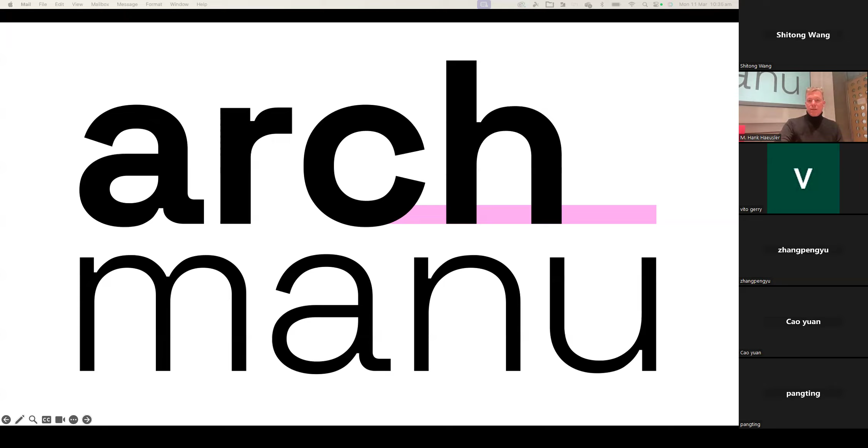So very quickly, as outlined, I've got a few hats. Over the years, I got quite busy in first doing the bachelor degree in computational design, and now more recently having those research projects and starting a little office, taking Philip as an example, that you could be an academic and still a practitioner at the same time. So we try to use a practice as well. So the three main things that I do right now: the ARC Training Center, which is a big research organization with 25 PhD students. You should understand that as a vertical organization where we research in 3 different areas I outline later.

And then we've got an applied vertical, the CRC 3D printing, because even though we are called architectural manufacturing, we don't really do actual architectural manufacturing research in the center. We do pre and post production and design in the center, but not fabrication. But the CRC is now a project where we can trial fabrication, and then the bureau is a computational design bureau where we can monitor ourselves, what we do through computational tools, and then test and prepare ideas for the ITTC and the 3D printing project.

So what motivates us? Well, there are 6 motivations. Architecture, engineering, construction is responsible for 50% of global emissions. 50% of all landfill waste is from us. Now imagine if you demolish a building, it's a huge amount of materials. And we also use 60% of all natural resources. These figures are probably from a German context. I used a book from Werner Sobek. But I think they would be very equal in Australia, in China, around the world. We really take a great part of the problem that we face at the moment with climate change by being architects.

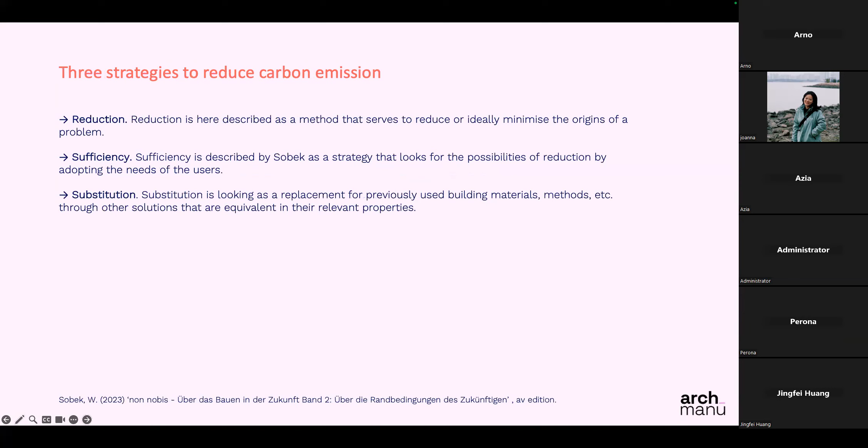Werner Sobek, an engineer from Stuttgart, wrote two really, really good books, unfortunately only in German. It's a big pity because then only Germans can read it. In these books, two of which have been published already, he talked about where we have to start from, looking into some sustainable concepts. To argue that we only need to build in timber is an illusion. There's not enough timber around on planet Earth to build in timber.

So in his second book, he looked into different strategies to reduce carbon emission. One is reduction by reducing the amount of materials, lightweight structures. We reduce the amount of materials, so therefore we save resources. We'll produce, therefore, less waste. We emit less carbon. So reduction is definitely one option.

Sufficiency looks at the possibility of reduction of consumption, the needs of the users. I think, unfortunately, it is an illusion to think that everyone in the world will have the same standards of living as the Western world would have. Air conditioning, warm houses, there's not enough material around. So I think slowly we need to come to grips that we need to design better with the materials we have already, potentially recycle materials, and reuse things that we have used before already in our design.

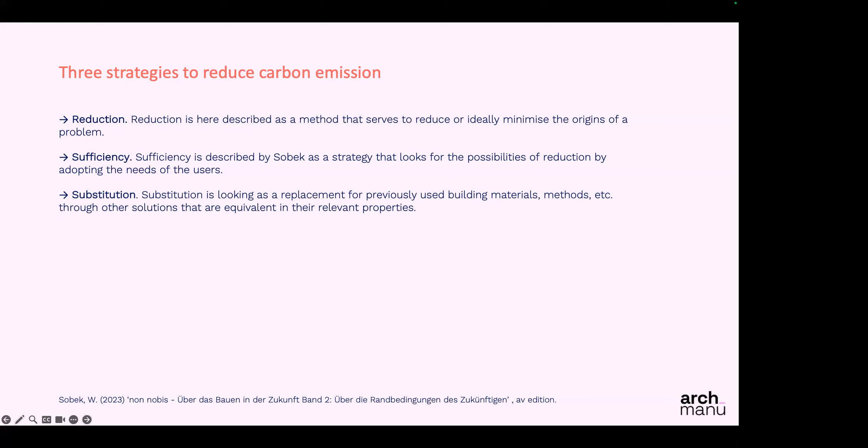And substitution, maybe looking into materials that grow. Timber, of course, grows, but so does mycelium. So maybe looking to biomaterials that grow again, where there's nearly an endless supply, versus a finite supply of sand. Sand for concrete slowly runs out on planet Earth. So to continue building with concrete is not possible because there's not enough sand around on planet Earth. But is there a way to substitute existing materials with new materials? That is one of the areas we want to explore.

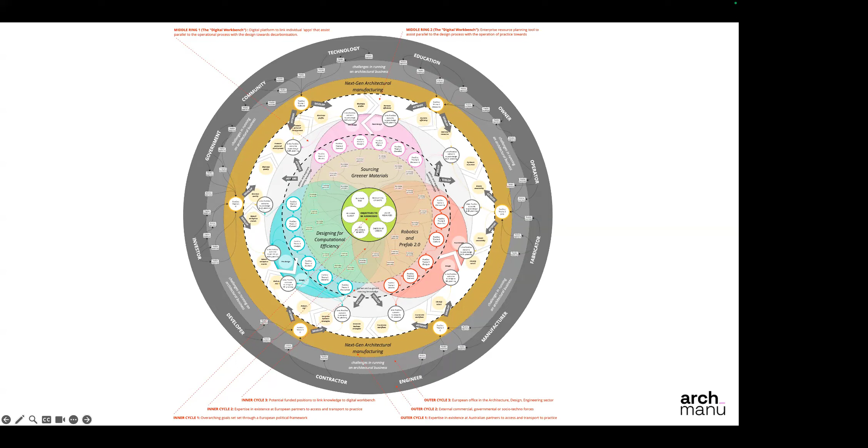So that's one of our maps of the world. It's rather complicated, that map of the world, but I think it captures a lot of our ways of thinking. So let me quickly outline that map. In the center, really, we've got the six areas that I outlined before. It's really the emission, the materials used, the waste produced that we need to reduce.

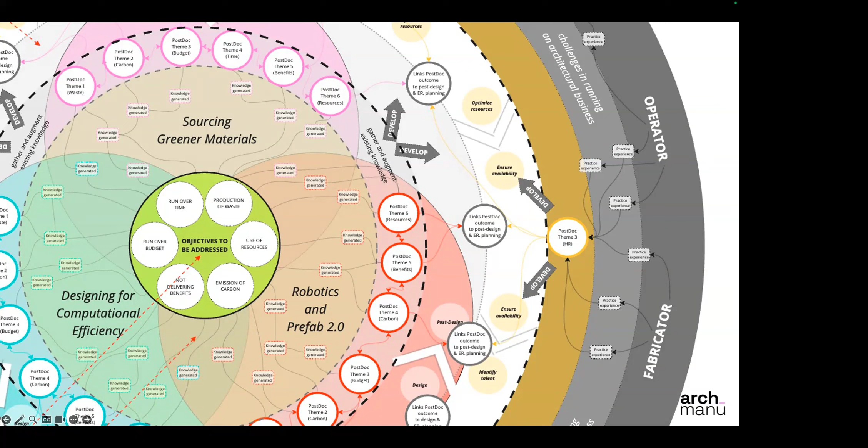On the other hand, on the outside, you as an architect are probably conflicted between the need to design more sustainably, but at the same time, you have to deliver your project on budget, on time, for the benefit of the community. So you're conflicted in the sense, yes, I want to build green and I want to use a sustainable material, but the material costs six times the amount of money of the other material, and it comes three months later than the other material. And it's potentially a different dimension, so I can't develop my design as I want to. So there's a conflict there. It is quite hard for architects to do these kinds of things, but that's the reason why we want to research into them.

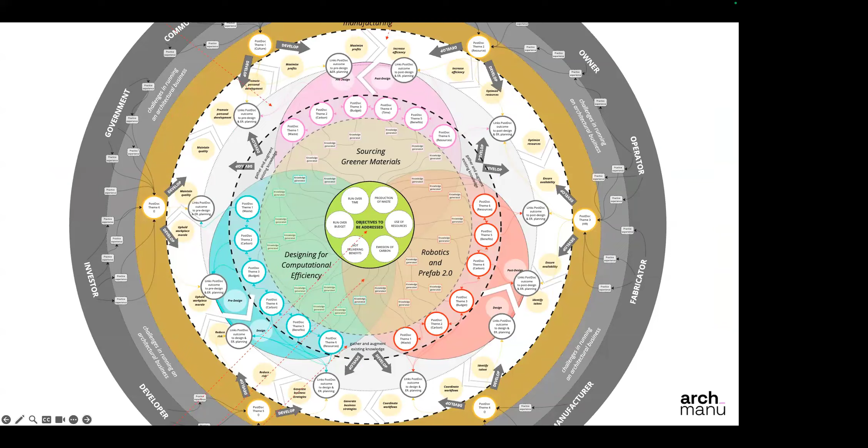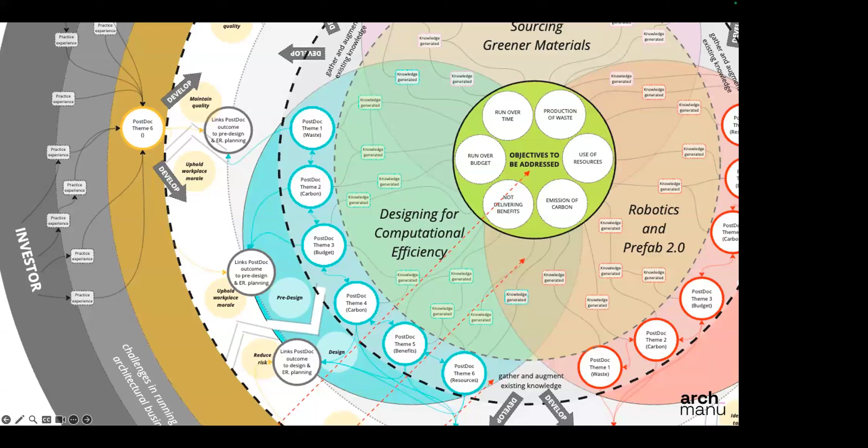So then within the area, we've got three main areas of our future interest, and I want to outline those three different areas in detail now. The first is designing for computational efficiency. We've done that for a few years now. In 2014, I established a Bachelor of Computational Design. In the Bachelor of Computational Design, we teach students only computational design.

They apply their computational design thinking and their knowledge of tools to architecture, landscape architecture, and so on, but they're not architects. They're not accredited as architects, they're computational designers. In the same way, if you study industrial design, you're not an architect, you study industrial design. So we argue that computational design now needs its own degree because it simply affords certain things that other degrees don't.

So around 400 graduates have been educated already. They find employment in firms quicker than architects because they've got skills that architects don't have. They can program computers, they can work on a project with an architect and say, here's a Revit model. In my Revit model, I have hundreds of different kinds of doors, and I want to have a door scheduling script that ensures that every time we change something in the design, the door scheduling is correct. A very mundane exercise, but needed in the firm. You can do it manually, days and days and overnight, or computationally, where the computer constantly responds to the design.

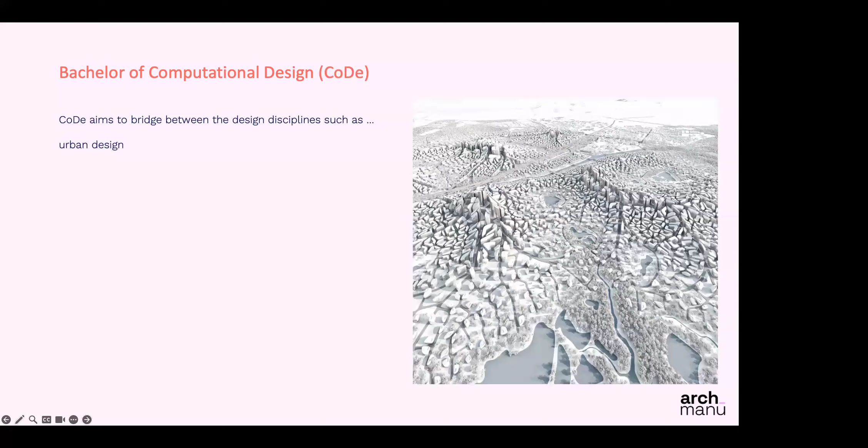In computational design degree, we aim to bridge together disciplines like architecture, urban design, landscape architecture, industrial design, interaction design, gaming design, or user-centered design on the design side, together with engineering science disciplines.

I think one important way of thinking about computational design is the following. Everything we see here that is designed is geometry. That coffee cup is geometry. The room is a geometry. The watermelon is geometry. Everything is geometry. Geometry is mathematics. If it's mathematics, you can explain it to the computer because the computer understands math. And then you can develop a giant equation that just takes all these different elements together. At the end of the equation, you've got a building or a city or an object. That's just a matter of scale.

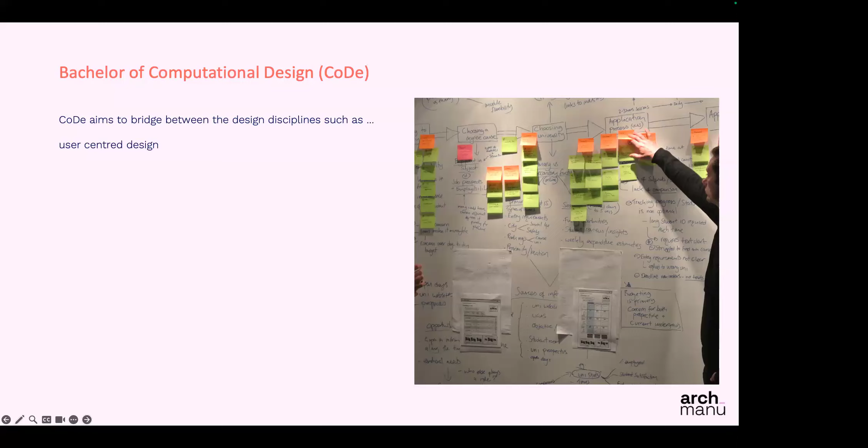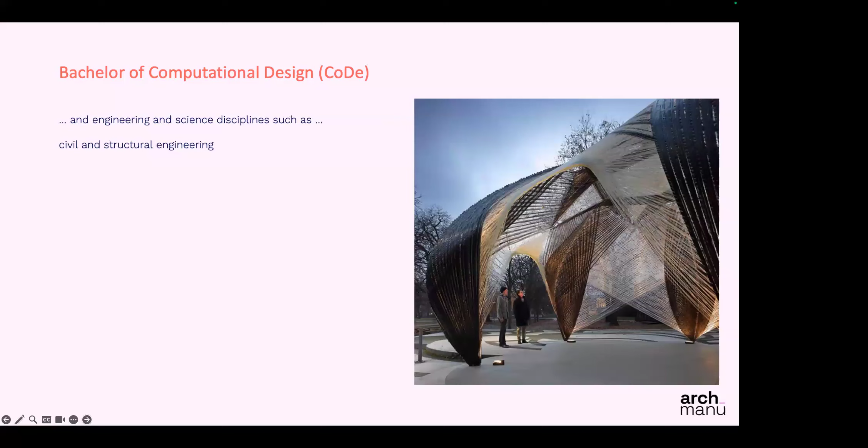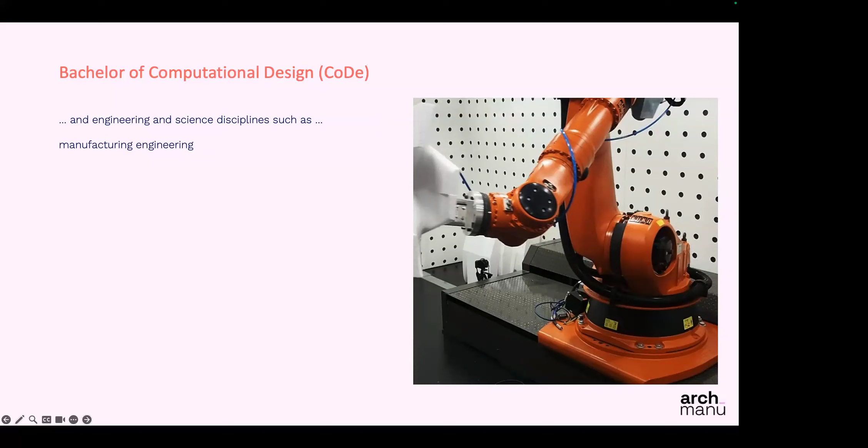If your dimension in one of those numbers is a millimeter, it's industrial design. If it's kilometer, it's a city. And you then got the opportunity to feed into the equation physical elements that come from different disciplines like electronic engineering or civil engineering. It's very, very easy - you all know how to bring a structural calculation into a computer program. You just explain the numbers to the computer program and then the design responds to that. Manufacturing engineering, as soon as it's machine readable, it's machine code, you can feed it out. You can take biological information, science information, human-machine interaction, mechatronic engineering.

So it's not that our students learn all these kinds of things, but they've been educated to think through these things. So they've been opened up to think between design on the one hand and engineering science on the other, through a profound understanding of computation and computing, combined with creative problem solving in a postdisciplinary framework using action research methodology. So they really sit between different disciplines and say, well, if we want to work together, I can speak to different disciplines, and through my understanding of computation and computing, I can do so.

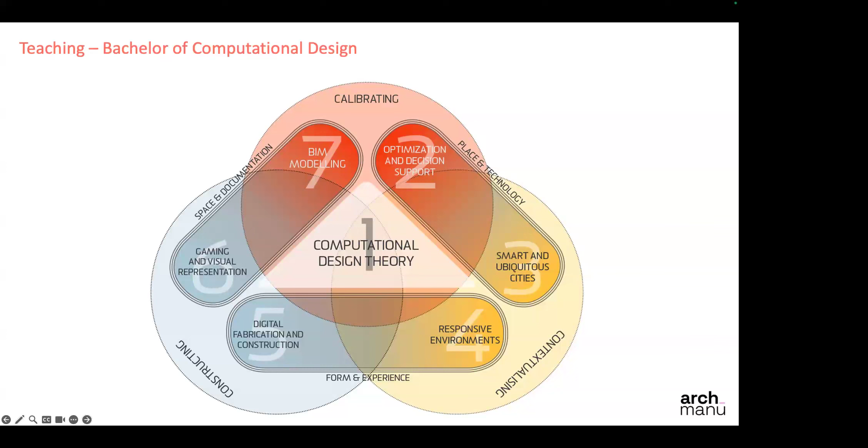So that's the framework of teaching. We don't want to educate CAD monkeys. We want to educate computational thinkers. So we place theory and thinking in the center of the degree. All our students will learn computational design theory, thinking, and then apply that kind of thinking within a framework of tool sets and a framework of problems around them to apply.

So here's the degree. At the beginning, we've got a design collaboration studio. We've got some shared studios that we share with other design disciplines that are not computational. We introduce computational design theory 1 in the first year, where we really explain what is computational design thinking, what do we do differently than other disciplines did before, what other people have thought similar to us, and how can you build that up. Then it goes into Grasshopper 1 on object design, Grasshopper 2 building design, Grasshopper 3 on structures using structural optimization, on urban design, then systems where you've got a lot of data and conflictive multi-objective optimization.

And data, where we slowly reach out to AI and machine learning as well. These courses still use Grasshopper, but more as a sketching tool, because Grasshopper is good - it's easy to learn, easy to get into, but it's not very robust. So we're slowly going to move here to JavaScript. We use a lot of homepage programming, as we think the future of computational design as a tool set could be on the web, so therefore JavaScript programming is what we teach students there.

In parallel, you've got design computing 1, Python scripting on design problems, design urban computing, a second Python course on electronics - so Phidgets, Arduino, Raspberry Pi programming - then robotic computing, where students use Python programming to directly operate a robot. Again, a computational design theory 2 package, where you get a second set of theoretical thinking, more advanced.

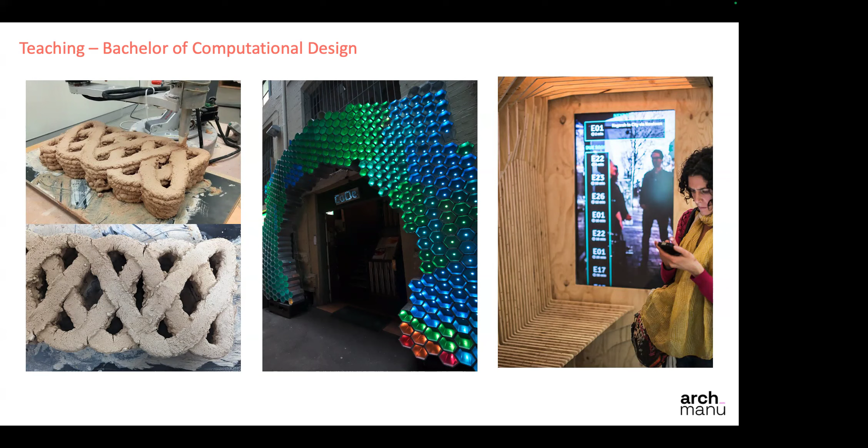So yeah, every year we've got the computational design conference where students present the results of their thesis and talk about that.

So we want to replace carbon-intensive materials with low-emission, grown materials, with potential looking particularly into Australian materials. We've got very strict biosecurity laws in Australia, so it's very hard to bring, for example, coconut fibers into Australia from the Asia-Pacific region because of biosecurity law.

At the same time, we've got lots of agricultural waste in Australia—we produce cattle, grain, wine, beer, all these kinds of things, and each of these agricultural manufacturers produce waste. So we want to look into agricultural waste as a building material in the future, looking into various bio, local, or low-emission construction materials.

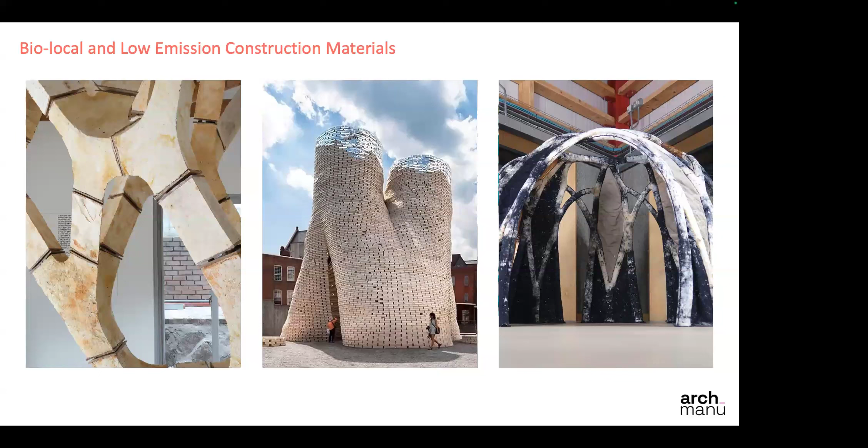Here are a few projects from other areas, particularly in Europe, where you can see a huge trend—some photos from Copenhagen from last year in September, from an exhibition at CITA in Copenhagen. So I think there is an interest in biomaterials.

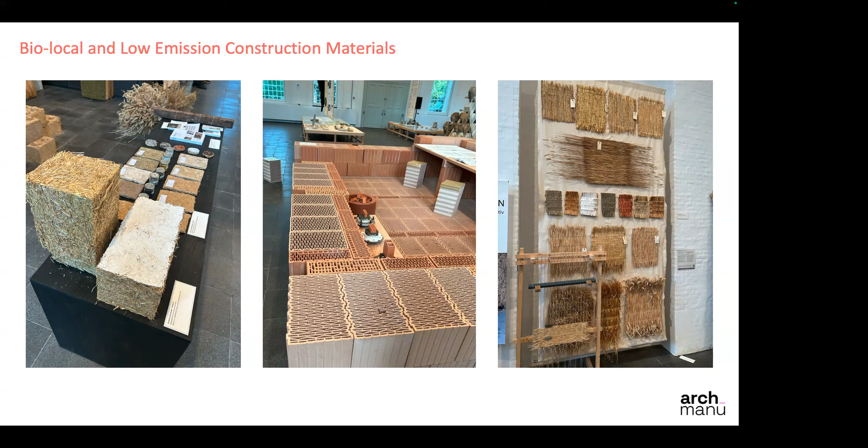We slowly start looking as well into biomaterials, generating elements out of mycelium and structurally testing them. We can feed the results of the structural test into Karamba, which gives us an opportunity to computationally calculate what the material can do and how you can fabricate with it.

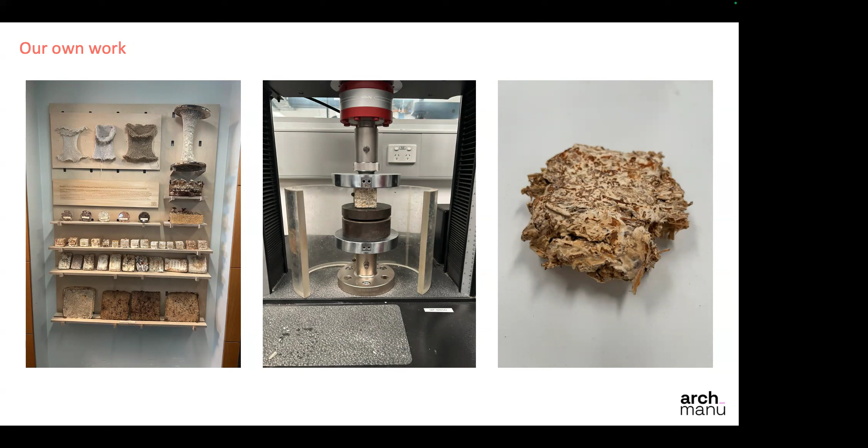Robotic fabrication is another area we've been looking into—again a rather young trajectory. I hesitated for a long time to look into robots, not because I don't like robots, but because other people, like Philip or Achim in Stuttgart, are by far too advanced, or the colleagues in Zurich, in robotic fabrication as a research topic.

But now, through the education framework with the students, I think it makes sense to educate them on a bachelor level. Through time, there's also a trajectory of training so we can do research, because to do good research you need talented students trained in computational robotics—then you can go immediately to the next level because you don't have to start from zero. When students come into a master's or PhD level, they already have some knowledge. We also got some funding through a government grant on 3D printing, which I'll talk about in a minute.

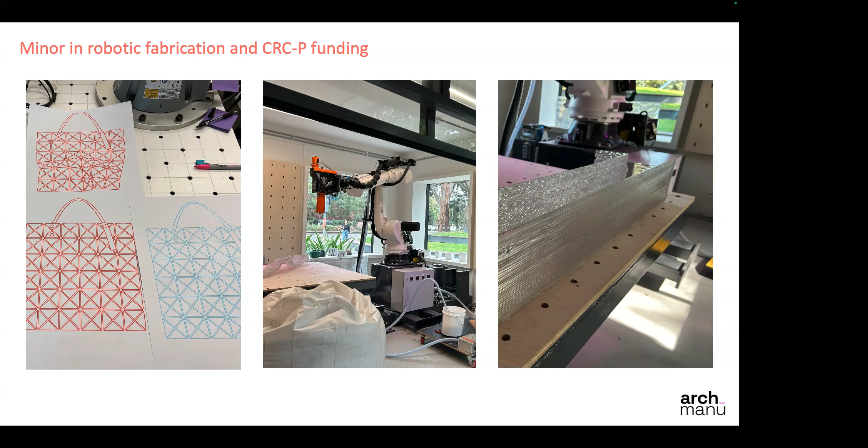So we do some small projects—we were commissioned by Issey Miyake for the Bao Bao bag to do some robotic drawings, and we're also doing some 3D printing with robots. We're working on that at the moment.

These are acoustic panels using recycled plastic. One of the meeting rooms in our office has rather poor acoustic performance, so we decided to design some acoustic panels. Six of the seventeen panels were fabricated already when I left—by now most of the panels are probably completed, and we'll install them in the room, test their acoustic performance, and potentially publish the results.

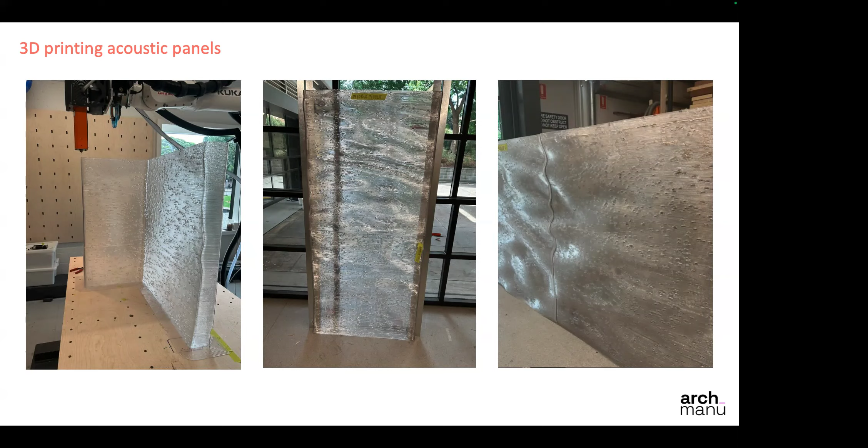So the second big research project is really CRC-P 3D printing for remote environments using local materials. For that, I probably have to explain a little bit about the Australian context.

Australia is probably the same size as China, but in the whole of Australia there are probably fewer people than in Shanghai. So we've got 30 million people over the whole size of China.

That means the whole country isn't empty, but there are certain parts that are rather empty, where you have to travel potentially 300, 400, 500 kilometers between village and village.

So if you live in one of those villages and you want a house, the only way to get one is by getting it designed and built in the capital cities. For example, in Perth, a big city on the west coast of Australia, you cut the house in half and bring it 4,000 or 5,000 kilometers up north to install. So you can imagine the cost of delivery is enormous.

These houses normally cost 60 to 80% more money, and the house you get is therefore a rather poor quality house, often not made for local conditions. Perth has a more moderate climate, similar to Wuhan, while the north of Australia has a tropical climate similar to Hong Kong. So these kinds of houses are not adequate, and they're expensive. What we want to look into in our research is changing the design for these houses by using local materials.

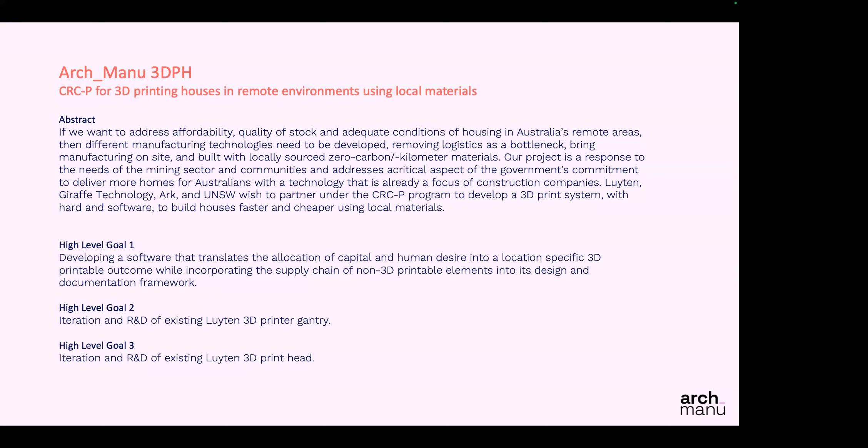So one of the main goals we have is developing a software. There are 3 main goals, 2 of them from the manufacturing side, from the 3D printing company we partner with. But what we want to do is develop a software that translates the allocation of capital and human desire into a location-specific 3D printable outcome. That's our vision.

Imagine a map of the world on a homepage. On that map, you can identify your site, and with a few clicks you say, this is my location. By clicking on that site, you would immediately get all the information related to it - GIS information on the homepage, so you'd understand the setback, the building height, the environmental conditions, heritage overlays, soil conditions, you name it.

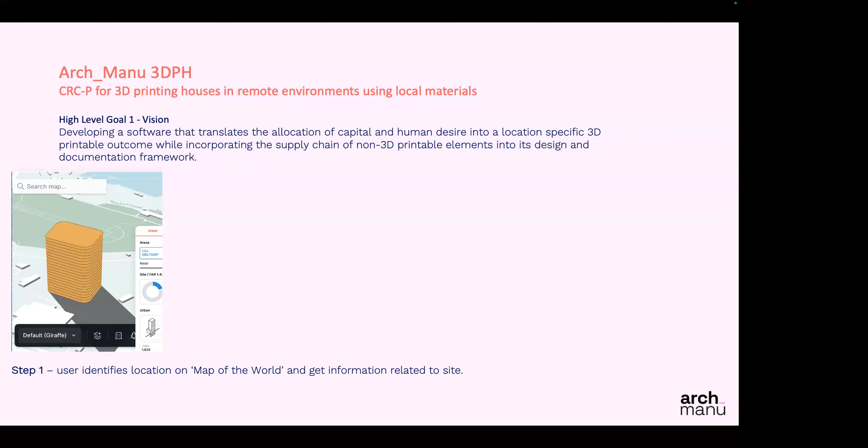In the company Giraffe Technology, which I co-founded, we already have that in place. I can go to any site, click where I am, and download certain layers that are publicly available. With all these layers, I get a full understanding of the context of the site, so I can design within that context, or the computer understands the context of the site.

The second thing doesn't really exist in architecture yet, but you already use it on Airbnb. When you look for a location on Airbnb, you can find a site and say my budget is between X and Y, and I need 3 bedrooms, 4 bathrooms, a pool, a sauna, a TV - you specify what you want.

So we want to use the same kind of principles for house design. You can go to the site, tell me your budget, how much you can afford to build a house, and what you want to have. It's similar to a brief in an architectural conversation with a client at the beginning - you say what do you want, and the answer might be: a house with 2 bathrooms, 1 bedroom, a garage, a living room, a kitchen, and I've got $1 million to spend.

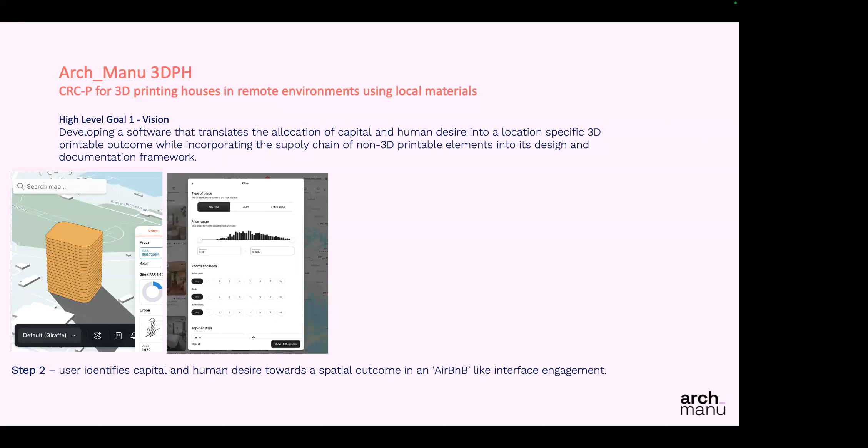That's my budget. So we can bring that information as well to the computer. It's numbers, so it's easy to compute. Step 3 is then using a template for a house. So we want to go away from the idea that you can design any house that you want to. We want to be more restricted in the same kind of way you're restricted when you buy a car.

If you go to a Porsche dealer, you will only get a Porsche, and you can choose between different Porsche cars. If you go to a Volkswagen dealer, sorry, only German car brands now, you can choose the range of the car you would have. But within the range of the car, you still got a lot of specifications. You can have different performance of the car. You can have different style of the car, the colors, the finishing, and so on. And whatever you choose will be a different look and feel of the car.

So imagine we're going to do the same thing for housing. You say there's 4 or 5 different styles of houses. There could be the villa style. There could be the industrial chic style. There could be the alpine lodge style. These are styles that you can explain to the computer as well. If you'd ask a computer with DALL-E, design me a house in a Norwegian wood timber style, well, the computer would understand what it is. It's seen a lot of photos, so you can use that as well. So we want to generate styles.

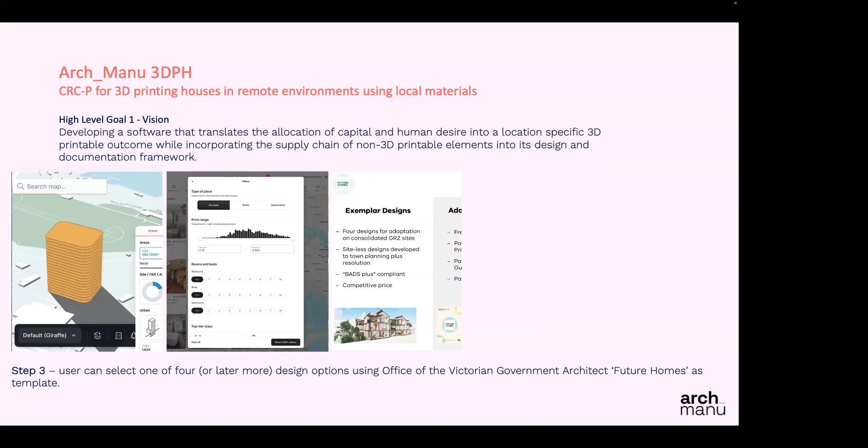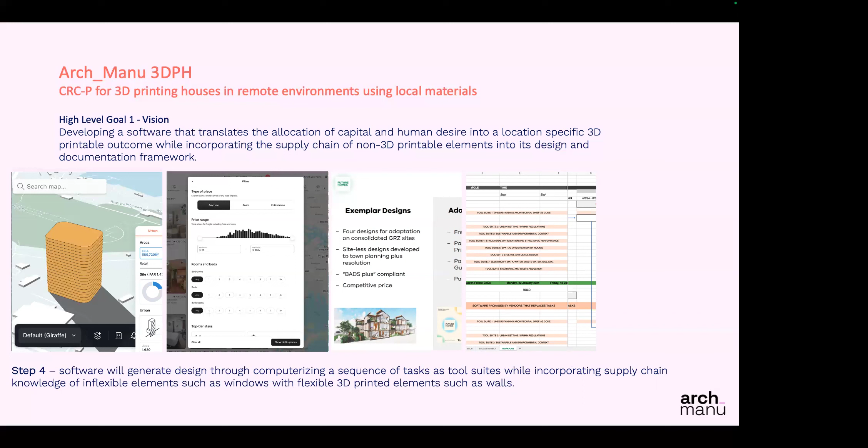And then with these 3 pieces of information, we start developing software that will take all these elements into a big computer program. And the computer program will then spit out machine code for the 3D printer to 3D print, Revit BIM information in order to engage other trades or look into prefabrication, DA, design approval for the government to approve the design. A set of 2D drawings can be generated easily, and visualization for the client, so the client could say, all right, okay, I can see what the design is.

And before I purchase the design, I want to look through the design. So imagine you've got a gaming environment where you can walk around and you say, well, I don't like the green floor, I want to have a blue floor. And you've been able to change that. By changing one material to the other, you immediately would have information about how much the material would cost. So the price would go up and down, the delivery time of the material. So you would understand the time of the project. So all this information could be computed.

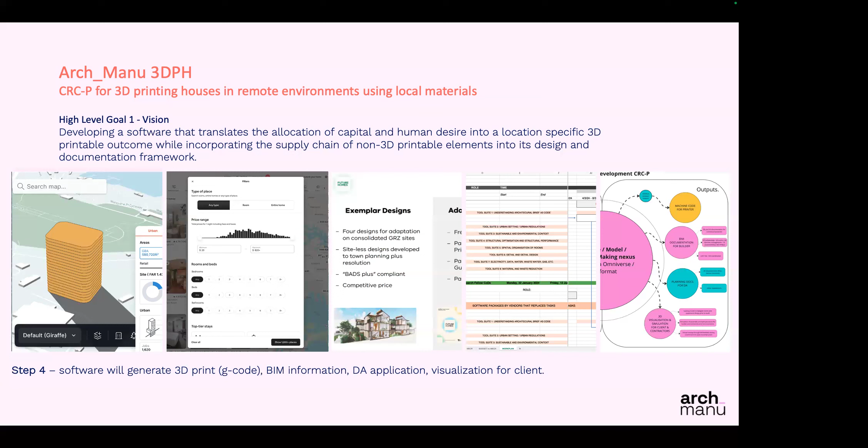We are also interested in 3D printing for another element when it comes to design for manufacturing and assembly, or modern methods of construction. Normally, when you assemble something offsite and you bring it to site, there's always a problem between different trades that things don't really fit with each other. There are tolerances. Construction normally is not a very precise trade. So you've got tolerances, and we bring 2 parts together and the tolerances don't really match because one thing is 3 centimeters bigger than the other. You've got a clash there.

I think 3D printing has the advantage for 2 areas. One, you can make performative 3D printing. Performative means that you can replace a lot of materials that you normally would use to build something with one material. So let's imagine you would build a normal wall. In a normal wall, you would have plasterboard on the inside, you've got some concrete, you've got some insulation material, you've got a cladding material on the outside, 4 different materials. 4 different kinds of carbon emissions, 4 different types of waste.

With 3D printing, you could do it another way. You can say, well, if I want to have a wall and that wall needs to perform in a certain way for thermal performance, for example, you can 3D print that performance into the wall. You can write a computer program that says, well, there's certain cavities within the wall, and these cavities within the wall would allow a certain U value of that wall, and you could 3D print it.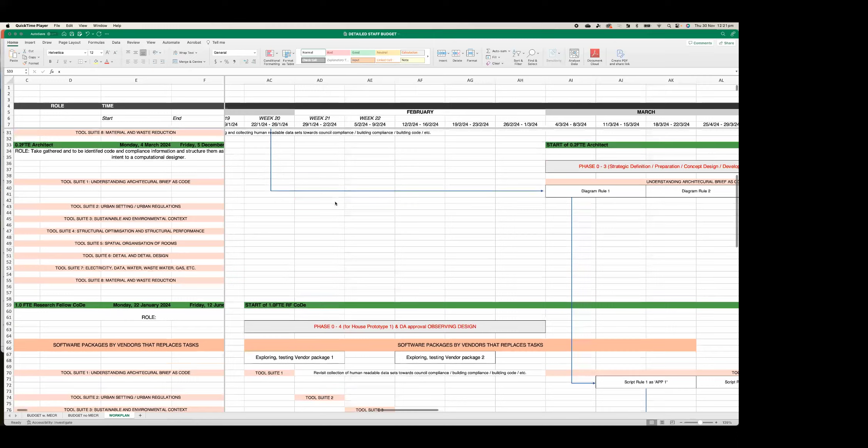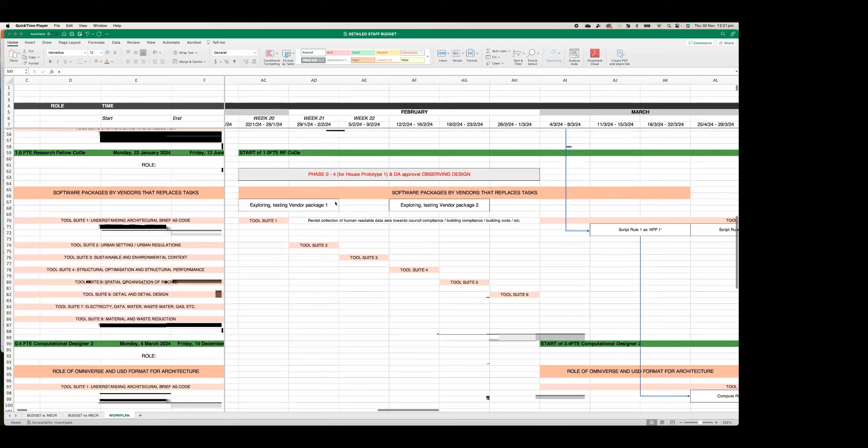So it's effectively software that sits in the computer and tracks every click you do, and then uses AI to inspect and analyze what you've done. So the software is able to understand: you opened Excel manually, you selected some numbers, you copied these numbers, you opened Revit and pasted these numbers in there. So the computer could understand there's an opportunity between a certain number set in Excel and a certain action in Revit that could be automated. So we can identify these little tasks, compute them in a computer program, assemble them, and do something similar to robot soccer.

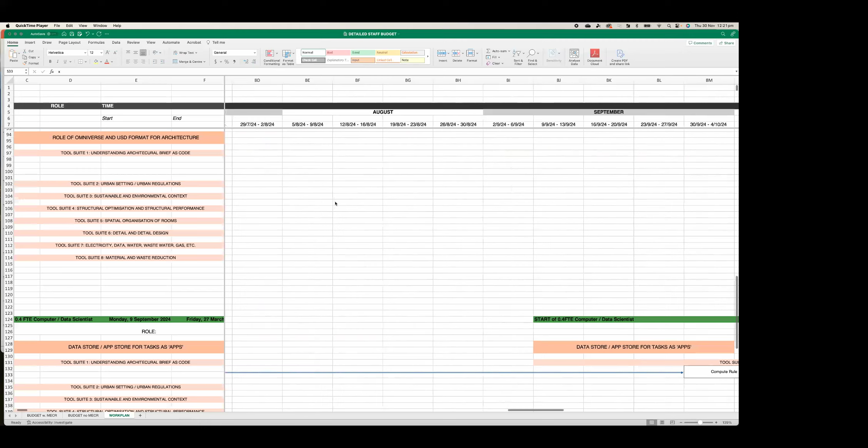In robot soccer or any autonomous system, you've got a task planning AI that enables the robot to execute tasks depending on the situation. So imagine the robot is now playing soccer. It looks around, looks for the ball, understands where the ball is, and knows what to execute. The situation constantly changes. So task planning takes little computer programs and reassembles them into something new. The ball might be different, the player might be in a different location, but it's still able to autonomously execute what it wants to do based on a task planning AI.

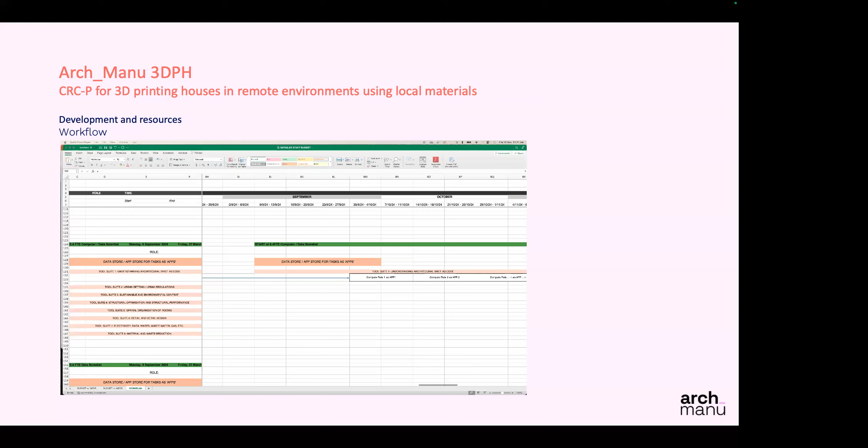So we want to do the same thing for architecture, where we say, well, the situation could be different, but we've got a lot of little individual tasks that have been computed, and the machine assembles these kind of tasks depending on the site, depending on the spatial arrangement, depending on the budget. So these are situations that change, but we don't really have to write one giant script. We have little scripts that have been assembled through the AI.

So we're going to do that now through a first iteration with a house, the house design. We looked into what do architects do all day through the process mining, task mining kind of tool. We test certain architectural prints in terms of how we can design them. What is the precision of the 3D printer? Do we really have a millimeter precision or a centimeter precision to calculate these precisions into the script? Does it change if the weather is cold, if the weather is hot, if there's wind in there, and so on? And then looking into how we collaborate and communicate as well.

I'm very interested in NVIDIA's Omniverse as a platform of working together because it enables us to bring all different tools together and link to Isaac Sim, a robotic simulation software as well, where we potentially on the long run can simulate what we design and what we build before we build it. If you look into NVIDIA and BMW, as an example, if you build a car manufacturing plant, you want to make sure that you can fabricate your cars to the maximum. You want to produce every few seconds, every minute a car. I think Tesla is producing every 38 seconds a new car.

So in order to do that, you need to simulate everything within your plant as well. So where's the robot? Where's the human? What material comes in there? What kind of process have to be made? How does the design of the factory respond to that as well? Could that be optimized? So I imagine in our research a future where before you build something and you potentially got cost overruns in the millions of dollars, give me the millions of dollars and I'm going to simulate the design to the nth degree. To simulate when is the truck coming, where's the builder standing, how does the material come out there, how does a human as a simulation assemble all the stuff.

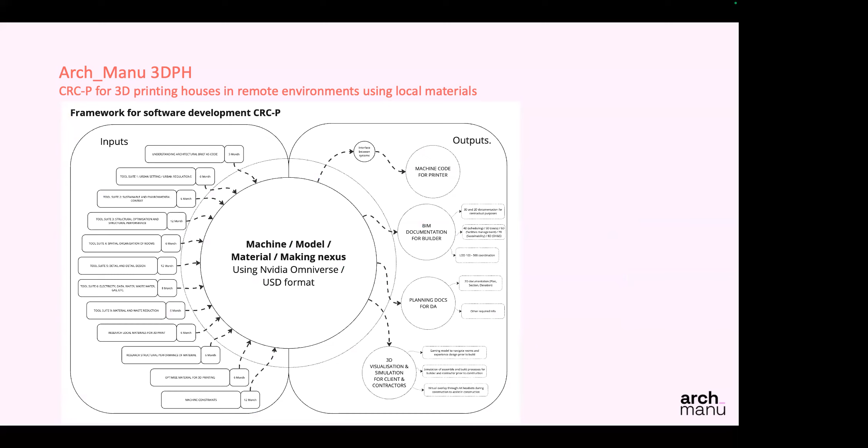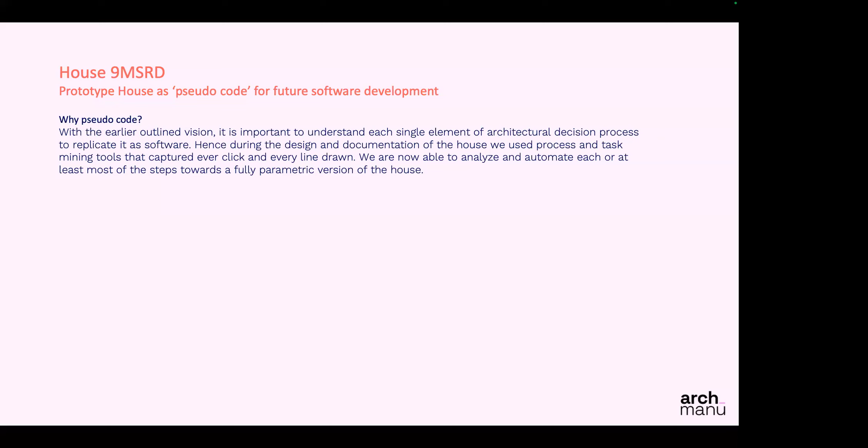So yeah, we've got then different kind of inputs, different kind of tasks that we're going to bring together through a machine model material making nexus, and through that kind of nexus we just generate different outputs, where 3D printing is one of the outputs. So the first house design that we've done, it's a DA approval. The documentation has been done already. It's really a pseudocode for us where we tried and tested how would you do design that we can later explain it to a computer programmer. So that's a quick, rapid shot from the design.

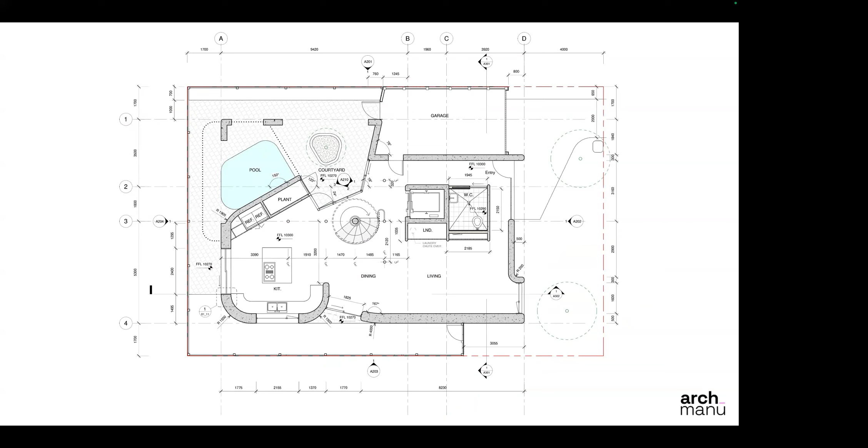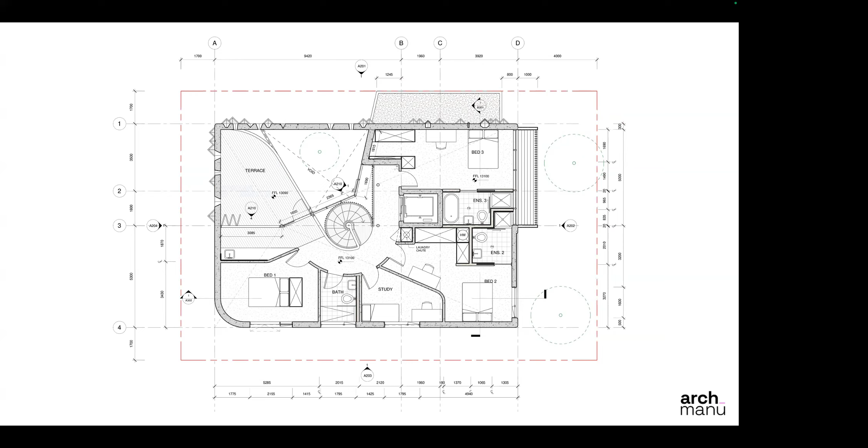That's the design. The design is not very important for us. I personally don't really care about the design. The client gave us the design. The client is the 3D printing company that sponsored us. So of course they want to maximize what 3D printing could be done. They also want to have a showroom potentially for the Middle East. So therefore a lot of bedrooms in there. They potentially see a future as well for the house for mining communities in Australia, where workers who normally work for 2 weeks on the mine and then fly out again for 2 weeks could live in there, having their own bedroom, bathroom configuration. So therefore, those many bedrooms and bathrooms.

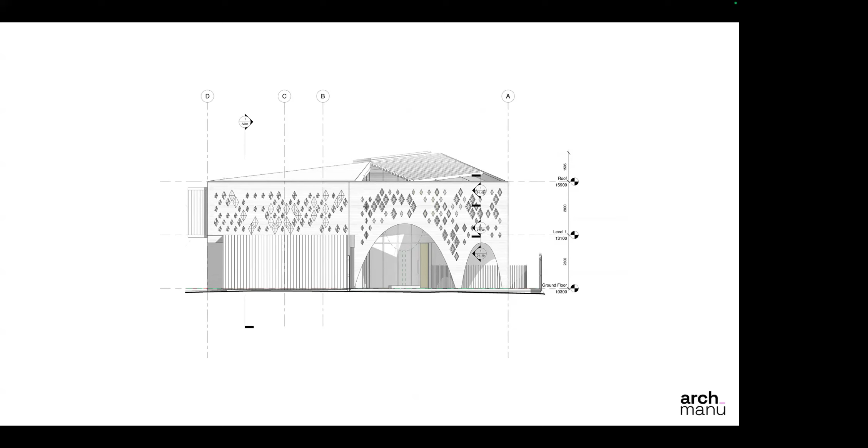Ceiling plan, roof plan, sections to the building. So I think we're going to finish the design by mid-year. We trial as well some opening perforation with the 3D print. I think that's more the interesting part of these arches. The main research for us is then really in the detailing of the design.

So is it possible that through a computer program, when you change that profile here to another profile, the 3D print can respond to that? Could there be a database of different windows? And the windows are described in their dimensions and their profile dimensions. If I'm going to go through my list and change them, this detail needs to change all the time.

Can there be a performative kind of element in there, which Kathrin Dörfler, for example, is already looking into in the 3D printing research, so that you get a U value equal to a passive house standard, and it's all done through the 3D print, not through insulation?

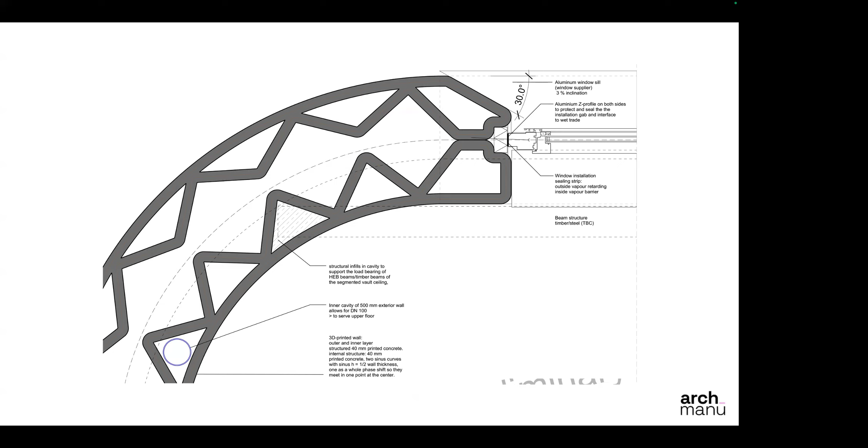Or here in the ceiling, can you 3D print a ceiling element where within the ceiling you have certain kinds of cavities where all the electronics, all the services go in, where potentially cooling elements could be in here to have a cooling ceiling, where potentially perforations could be in here for air conditioning? So you don't need an air conditioning duct anymore, like the ones you see here. So everything you see above there is all integrated in the ceiling. Again, so that you can later take it apart and recycle the concrete and recycle the other parts as well.

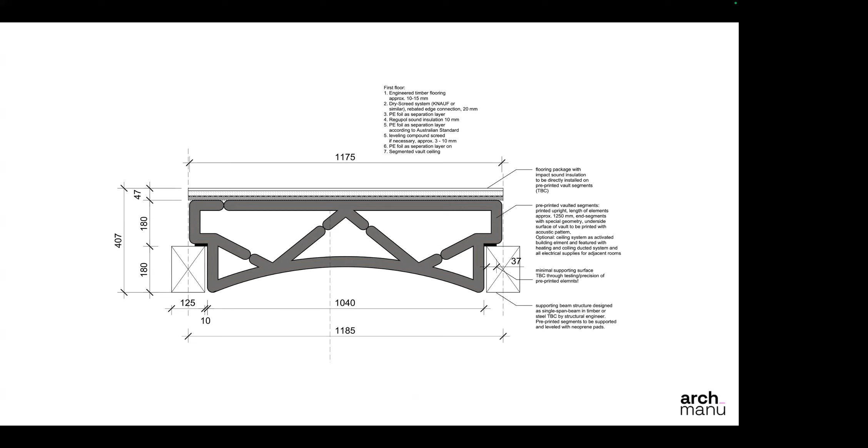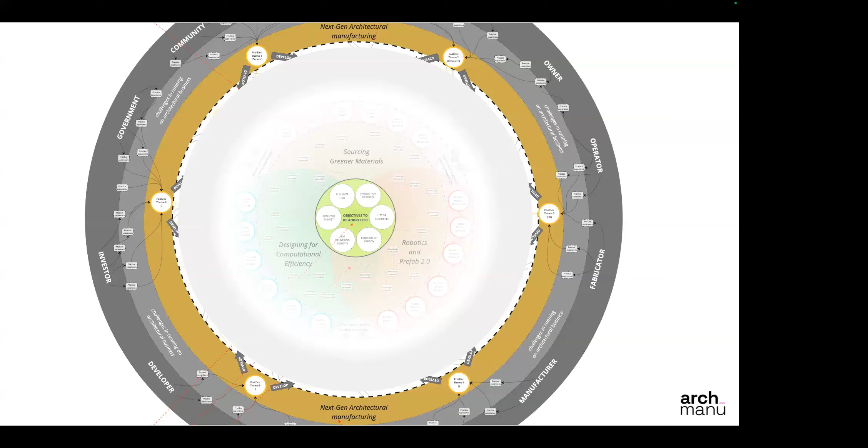So we have three main research projects in there. Architects are not producing any architecture. Architects are producing information for builders and construction companies to execute designs so they can build architecture. So what we produce day in, day out is data. The data we produced in the past was analog data through plan, section, elevation drawings on sheets of paper. But all the data we produce at the moment is digital data. And we do it over and over again.

The first action any one of you takes when you've got a new design in a semester is to go to your computer, set up a folder, name the project, and all the data live in that folder. All the data have a sequence. They're historically ordered. So you've got a biography of a project that has anything in there: photos, videos, 3D models, 2D plans, Excel calculations, Word sheets, email exchanges, you name it. There's a digital footprint of your project.

So through a machine, you would be able to ask questions of that data. Through a large language model, or other forms, you would really be able to understand what happened in that project. And I think that's very important and interesting, because at the moment, the only way to communicate and transport information on projects is through human experience. I've designed something over and over again, so I've learned something. If I want to share my knowledge, I can talk to you and say, you should do this and that. You should respect these elements. You should consider the following.

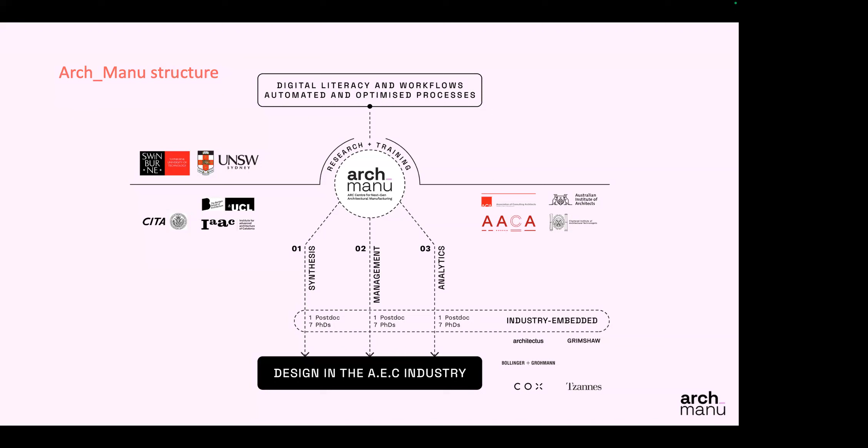That's the structure, really. As I said, the 21 PhD students have grown now to 25 PhD students, and 3 postdoc fellows will work on the research. So in order to assemble the PhD questions, we interviewed industry partners and academics, 50, 60 hours long, to define these themes and then those PhD topics. So the PhD topics are given already. What we want to do is make sure that those topics align with each other. Each PhD student is doing his or her own topic, but I want to make sure that topic 1 and topic 7 align with each other, because we want to make sure that the 25 PhD students transform the industry instead of just having little topics that don't really align with each other.

Synthesis again - what we're looking at is what we can do with the data once we've got it, and having some topics in there as well. There aren't many topics on manufacturing. The reason we call it architecture manufacturing is purely political. The Australian government isn't interested in architecture, it's interested in manufacturing. The manufacturing industry argues the only way to increase productivity and efficiency is through pre and post manufacturing. So pre-design, pre-manufacturing and post-manufacturing is really looking into design - that's what we do, and R&D as well.

Logistics, not so much, but as well. Post-manufacturing is then sales, service, and distribution - not so much either, but from a political argument we say what we do is architecture manufacturing, and the way to improve it is by looking at design. I think improvements in architecture construction could really be done on the design side, not the manufacturing or construction side. When you try to improve construction, it's already too late - decisions have already been made in design. So concentrating on construction probably isn't the right way. Therefore we want to concentrate on the data, the pre-design, and the management.

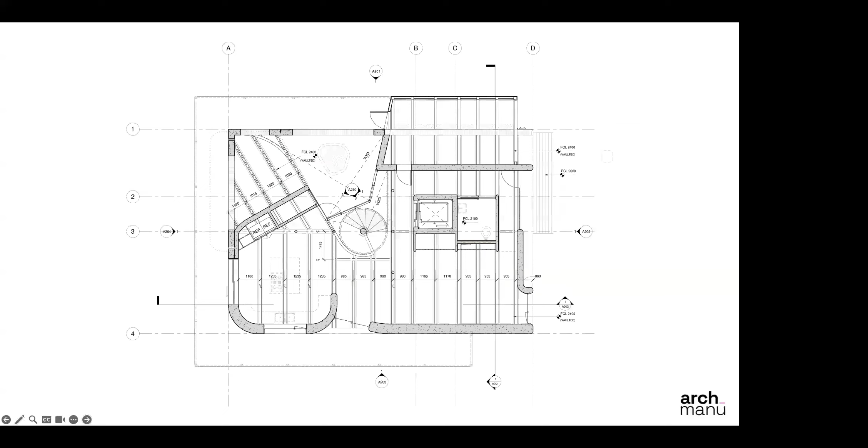I'm just curious, I know your project is aimed at different kinds of architecture. Within the four years, I can feel students learn a lot of computational thinking and technique, but what about the object they are designing for—how can they understand a building or a city in that sense?

Now, you're right, of course. In a 3-year bachelor program, when you study architecture, you're good in architecture, but not in landscape architecture. If you study interior architecture, you're good in that, but not in architecture. Same for our students—they're good in computation, but not really good in architecture, landscape architecture, or interior architecture. But you have to acknowledge that you don't do architecture, landscape architecture, or interior architecture in isolation—you do it as a team.

So we see our students as part of a team where there's an architect and an engineer who want to work together. Because they exchange information through the computer, our students could sit in between them both and say, well, if this is your design and this is your structure and you want to bring both things together, we can assist you and work on that. So they're working alongside architecture.